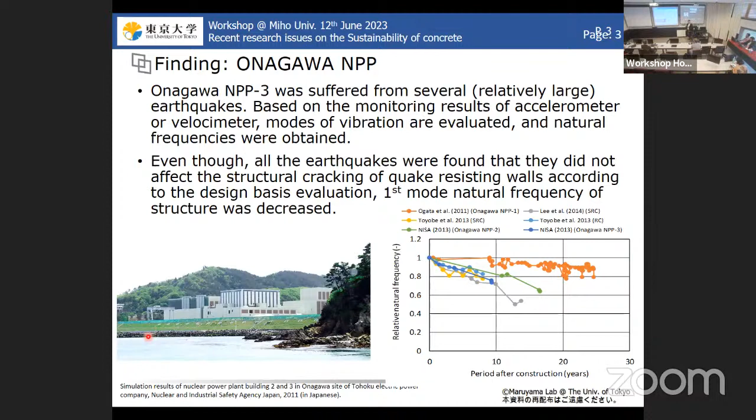And this is the normal reinforced concrete buildings, and here we see a rapid decrease of the stiffness. Some structural researchers generally think that this is due to small or middle range damage of the buildings. But actually, one of my colleagues found that...

this damage doesn't happen during the earthquake. It happens between earthquakes.

So this is an example of the relationship between the deformation and the force obtained from the accelerometer. We put the accelerometer in an important building and calculate the stress-force-deformation relationship every time. We found that during the earthquake, just before and just after, we don't see a difference. But from earthquake to earthquake, we see some reduction.

So this suggests that there is some possibility that something coming from the general environment can reduce the stiffness of the structure. Based on this data, I think this could be explained by the drying of the building, because the drying environment is universal for reinforced concrete buildings.

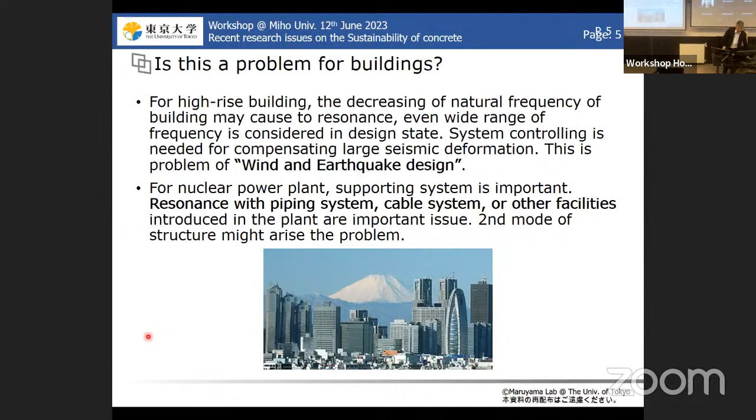So I started to research this topic. First, I would like to introduce the experimental research on reinforced concrete walls. I prepared two reinforced concrete shear walls. I won't explain the detail of the walls, but this follows a quite general Japanese code.

The reinforcement ratio is 2.8%, so a very, very high reinforcement ratio. I cured the specimen for a long period because additional hydration is not desired for this experiment. So I cured the specimen for 90 days.

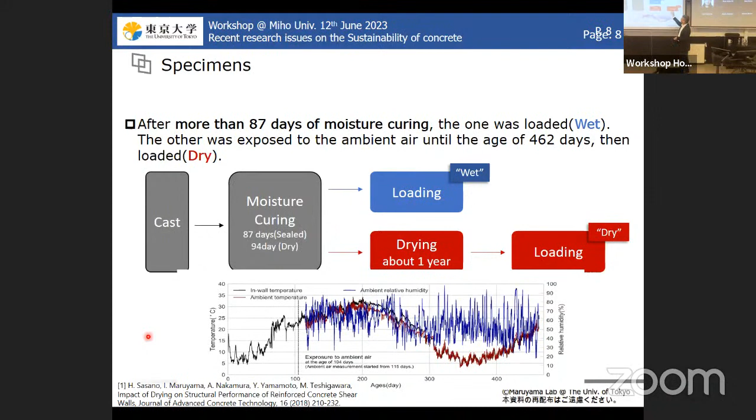Then I loaded one specimen, and the other specimen was exposed to the drying environment for one year, because the thickness of the wall is about 10 centimeters, or 8 centimeters, so it's easy to dry out. After reaching near equilibrium, I loaded this shear wall.

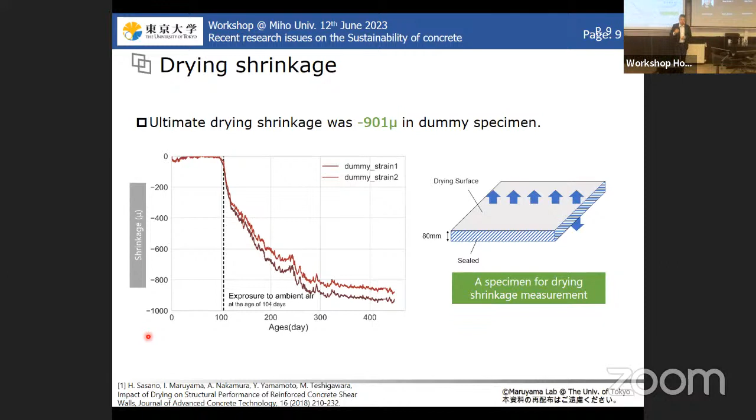I also prepared a dummy specimen, something like this, and measured the drying shrinkage of this specimen. It attained 900 microns, both horizontally and vertically. Then I loaded it using this kind of equipment and performed cyclic loading to evaluate the performance of the reinforced concrete shear walls.

I also measured the properties of the concrete. As you see, compressive strength increased slightly after the drying, while the Young's modulus is reduced. The fracture energy increased almost 50% after the drying. So we have to think about the impact of these changes on the structural performance of the reinforced concrete shear walls.

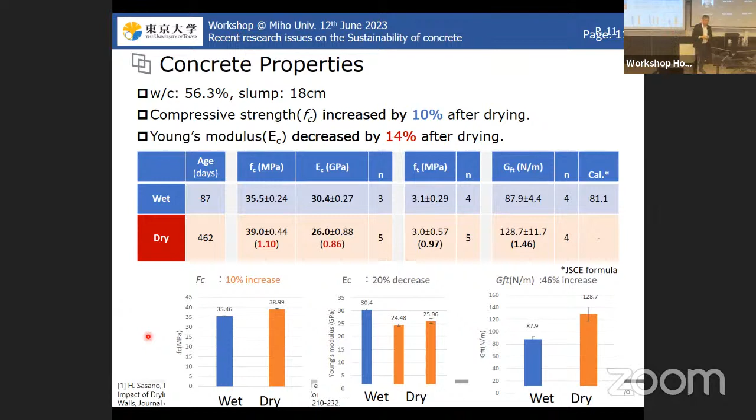This is what we observed after the drying in the shear concrete wall — we found very fine shrinkage cracking. The maximum crack width is just 0.15 millimeters, so it is not visible, and people looking at this shear wall would generally believe it is quite sound.

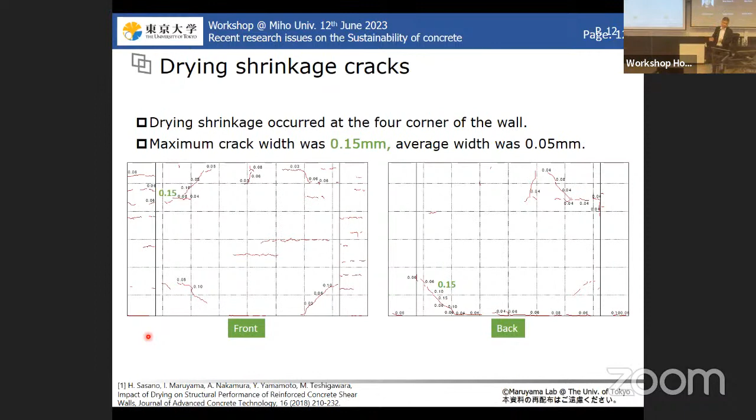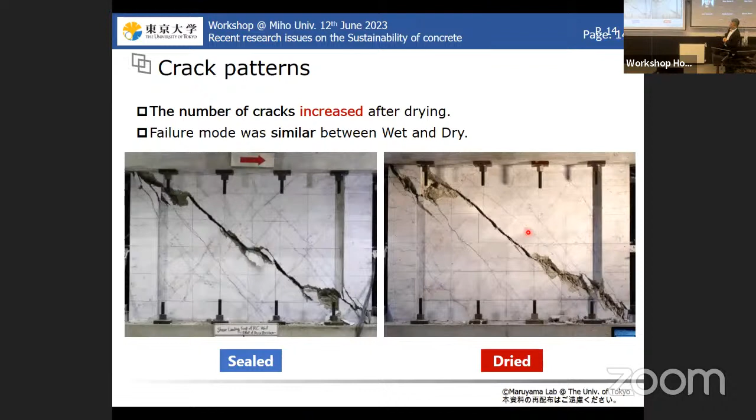The failure mode is quite close, as you see - very similar shear failure. And I tried to calculate some structural things.

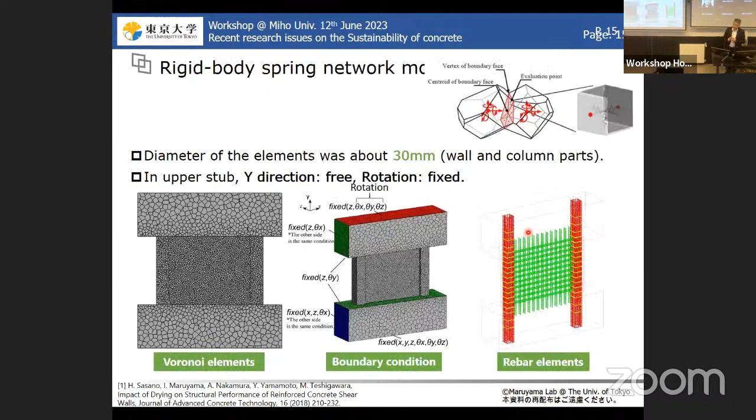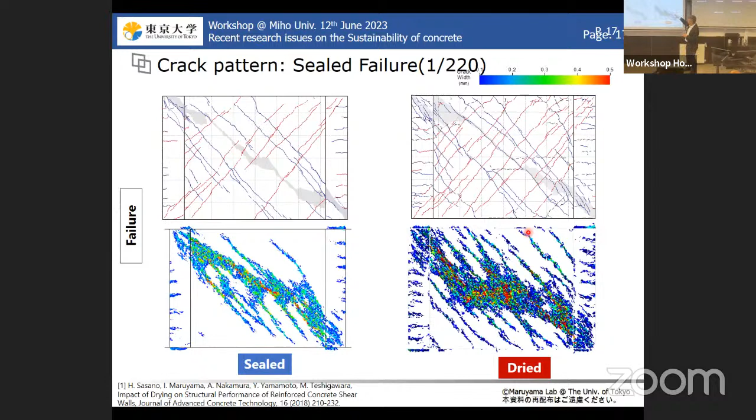This is the comparison of the crack patterns of the experimental results and the calculation results. We see a large number of fine cracks and shear cracks as observed in the dried case. But this is not so important.

What is important is how to calculate the ultimate strength of the shear wall affected by the drying. The ultimate strength can be calculated based on arch action, and we also have to think about strut width and the concrete strength in the concrete shear wall. This concrete strength is based on the material property, but also the factors which affect the compressive strength due to the cracking - I will explain a little bit.

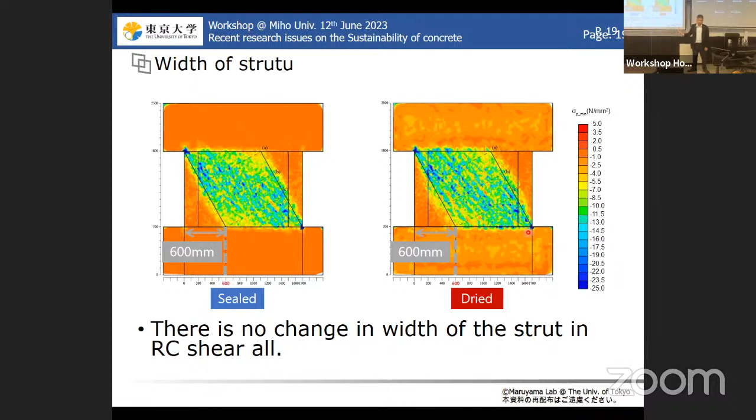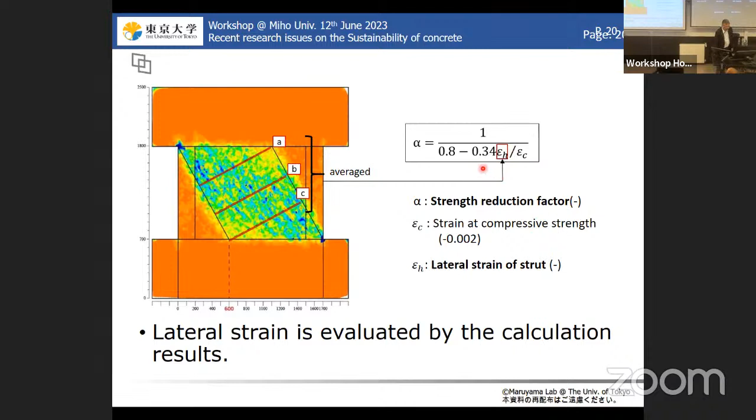To calculate the strut width, we confirm that the width of the strut before and after drying is completely the same. If we think about the concrete strength here, we can calculate how much strain is observed in this direction, which has an influence on the concrete strength in the shear wall. We calculate this strain based on a numerical calculation, and then evaluate the loading capacity.

The most important message of this calculation is that the compressive strength increase caused by drying compensates for the drying shrinkage induced cracking impact on the compressive strength. So if it shrinks and has shrinkage induced cracking, with less friction between the small struts, this has an influence on the compressive strength.

But it deteriorates the compressive strength. Due to the drying, we also see a strength increase, which compensates for the shrinkage induced cracking impact on the compressive strength in the shear wall. Therefore, if the compressive strength of concrete is reduced by the drying, it is quite possible that the loading capacity is reduced by just drying.

Today I couldn't talk in detail about how the compressive strength is affected by drying, but if we use certain kinds of aggregate, especially non-shrinkable aggregate, we see a reduction of the compressive strength. But if we use an aggregate which is quite shrinkable, meaning the aggregate contains clay minerals, we see an increase in compressive strength after the drying.

Now I move to the shrinkage and the shrinkage induced cracks. So now maybe 15 minutes.

In Japan, the natural aggregate resource is now limited, and the west part of Japan is suffering from a lack of good quality aggregate. If we use inappropriate aggregate in concrete, we see a large amount of shrinkage cracking found in buildings and civil infrastructure. So of course, the aggregate type is very important for concrete quality.

For that purpose, we prepared 3 different concretes whose mixture proportion, volumetric mixture proportion, is completely the same, but only the coarse aggregate type is changed. One is a very shrinkable one, and in this case we see large shrinkage like this. If we use, for example, pure limestone - sedimentary limestone - in this case we see very small shrinkage.

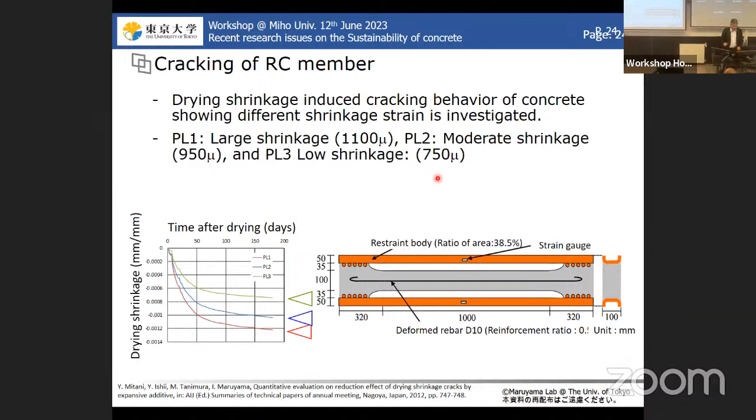Around 650 to 750 microns in this case. So we compared these three concretes under a restraint condition like this. This is the experimental results, and this is quite obvious - if we use the very shrinking concrete, we see a large number of shrinkage cracks.

If we reduce the shrinkage by using non-shrinkable aggregate, we see the reduction of shrinkage in the cracking. But please think about why this happens, because if the main source of shrinkage is coming from the hardened cement paste, and it is restrained by the outer frame, why does putting aggregate inside produce a different kind of shrinkage? That is my question on this topic.

When we swipe the surface of the aggregate with acetone, we found that if we use very large shrinkage concrete, we don't see any cracks on the surface. But if we look at the surface using limestone, we see very fine cracks on the surface. So it seems that it's a trade-off.

The total shrinkage of hardened cement paste should be comparable, but due to the different aggregate type used, one type shows a large number of visible cracks but no fine cracks. In the case of limestone, visible shrinkage cracks are less, but a large number of fine cracks were observed on the surface.

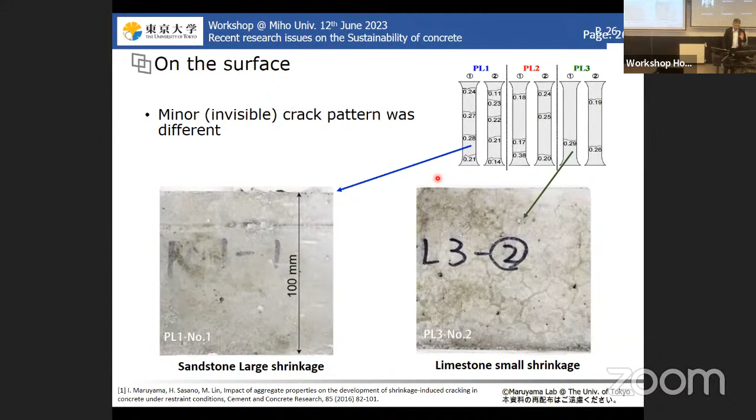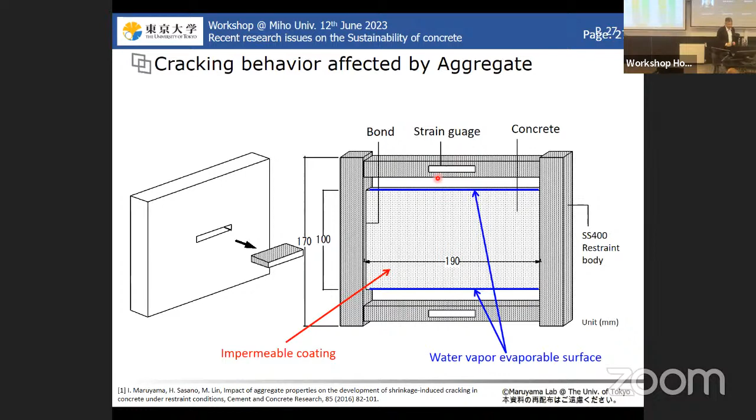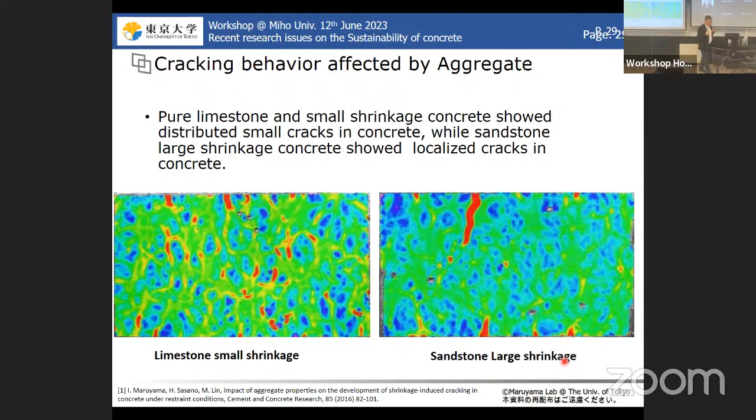So with the unshrinkable property and good quality ITZ, the cracks are distributed like this. But in case of the shrinkable aggregate and less bond, we see the cracks develop further, and visible cracks are formed. So actually, the aggregate crack behavior and ITZ property are very important for shrinkage-induced cracking.

I won't go into detail about which type of cracking is better, but with regard to durability, it seems large localized visible cracks are not appropriate, and distributed cracks are much better with regard to permeation or diffusion of undesired elements from the outside.

So then I move to the stiffness of the concrete. Generally aggregate doesn't shrink, but there is some range.

If we use limestone aggregate and the digital image correlation method, actually for cement paste with water to cement ratio of 0.55, which is a general ordinary ratio, the cement paste shrinkage is something like this: at 60% relative humidity, the average relative humidity in Japan, it attains 3,000 microstrain. But when we use limestone, the shrinkage is almost zero, meaning there is a volume mismatch between the aggregate and the cement paste.

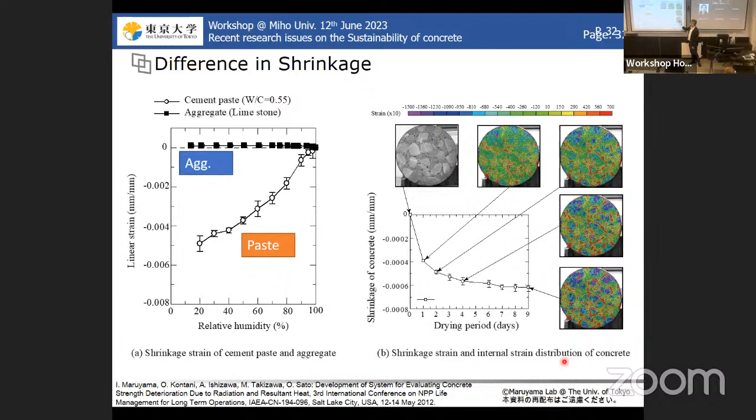So we should see some discrepancy, producing cracks inside. Therefore, around the aggregate, we generally see shrinkage-induced fine cracks, which can be confirmed by the digital image correlation method. If we use limestone, the non-shrinkable one, the cracks are distributed like this, but in case of the shrinkable aggregate, the damage is mitigated.

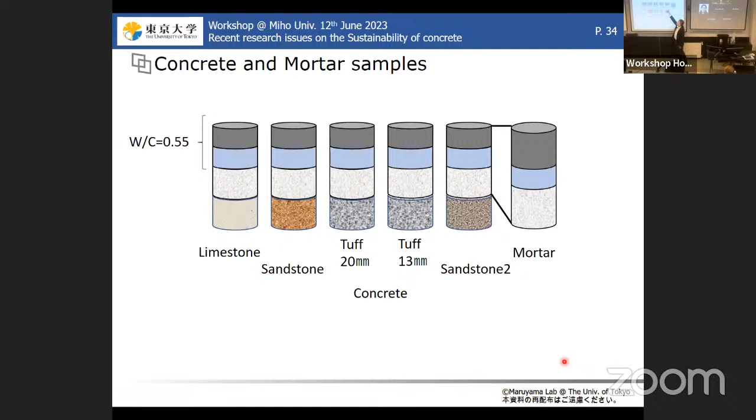It has an influence on some concrete properties. So I made 5 different concretes whose volumetric mixture proportion is completely the same, but only the coarse aggregate was changed. I also made a mortar whose volume mixture proportion is completely the same as that of the mortar part in the concrete.

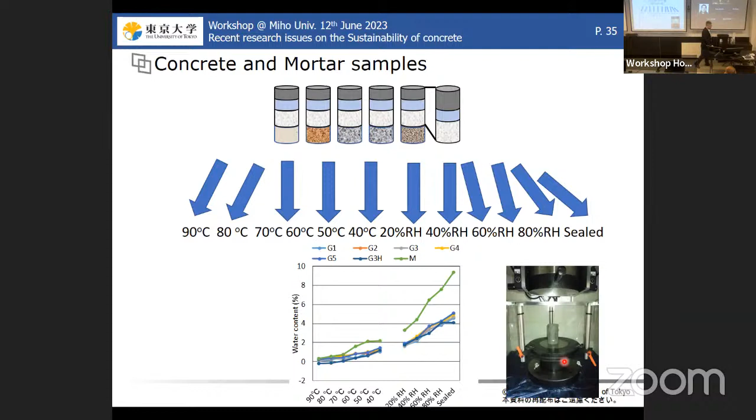After the long-term curing period, we put the specimens in different drying conditions for a long term. This is the desorption isotherm, showing water content of the concrete or mortar. Then we measured the Young's modulus. I also measured the shrinkage of the concrete and shrinkage of concrete and mortar.

So this is the experimental results of the Young's modulus of mortar and concrete. I also measured the paste, but I'll skip that today in detail. In case of the mortar, we see a decreasing trend, but the difference before and after drying is a little bit smaller than that of the concrete.

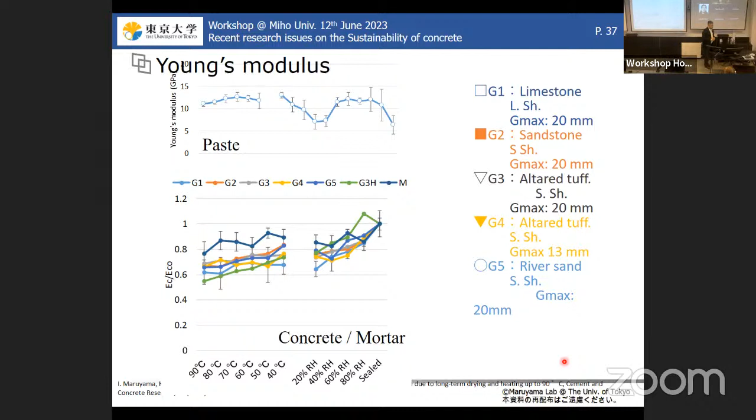Anyway, we confirm that the stiffness of the concrete can be deteriorated by only a drying process. Even at 60%, we see maybe at most a 30% reduction of the Young's modulus due to drying.

If we try to evaluate this reduction of the Young's modulus, considering the crack opening inside, this can be evaluated by the gap strain between the concrete strain and the mortar strain at the same drying state. So this difference should be compensated by a crack opening inside.

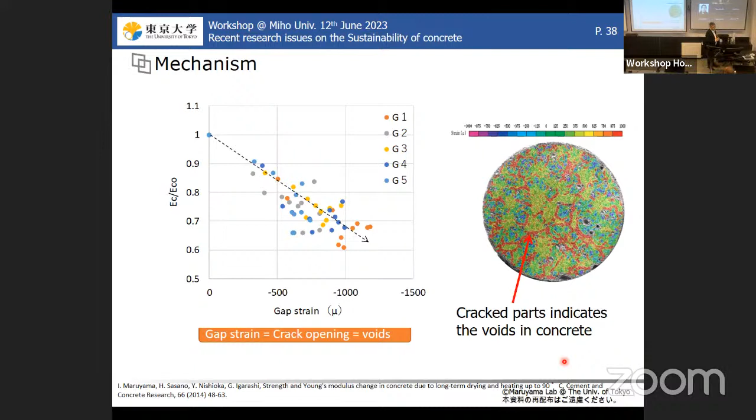Therefore, assuming that the crack opening can be evaluated by the difference between the strains of concrete and mortar at the same drying condition, if you plot the Young's modulus reduction as a function of the gap strain, we see a relatively nice correlation. So we found that the Young's modulus is deteriorated by the crack opening inside of concrete.

But then, how many minutes do I have left? No, it's okay. So we have to control this.

Shrinkage reducing agent has been developed in Japan since the 1970s, and we are debating the mechanism of this agent. I would like to explain what is happening in the hardened cement paste, and then also introduce what happens in concrete.

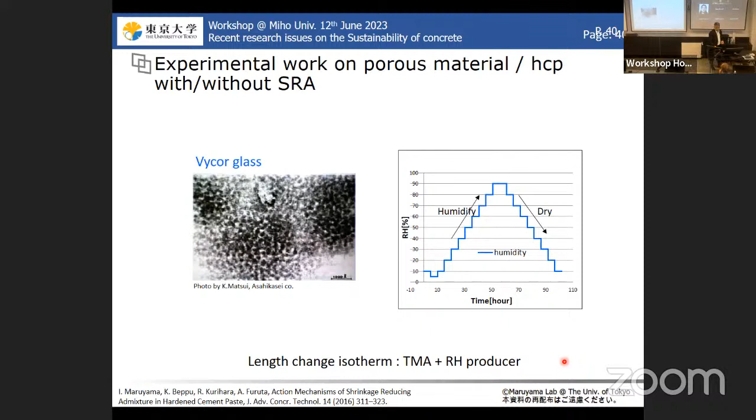From a poromechanics point of view, we try to evaluate the role of the shrinkage reducing agent by using Vycor glass. We change the relative humidity like this, and measure the mass change and the shrinkage. We also try to put the SRA molecule inside of the Vycor glass, and confirmed how the behavior is changed.

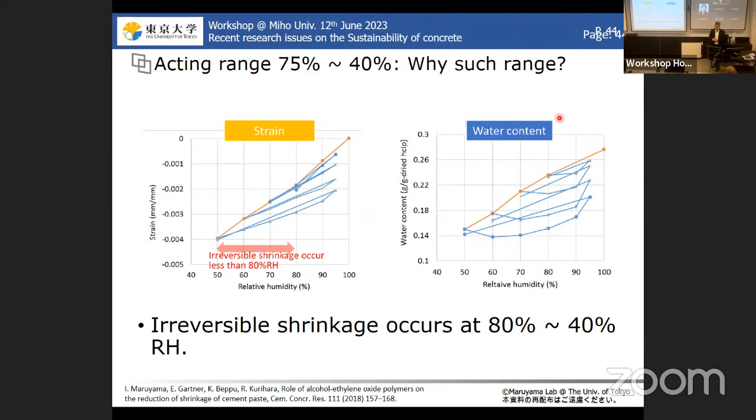I won't go into detail, but this relates to CSH agglomeration behavior under drying that happens during the first desorption branch, and the SRA has an influence on this behavior.

Then I investigated different kinds of SRA. The starting materials are water, ethanol, butanol, and ethylhexanol, and we tried adding different numbers of ethylene oxide groups to these. We measured how these elements perform, believing they have different performance on the reduction of shrinkage.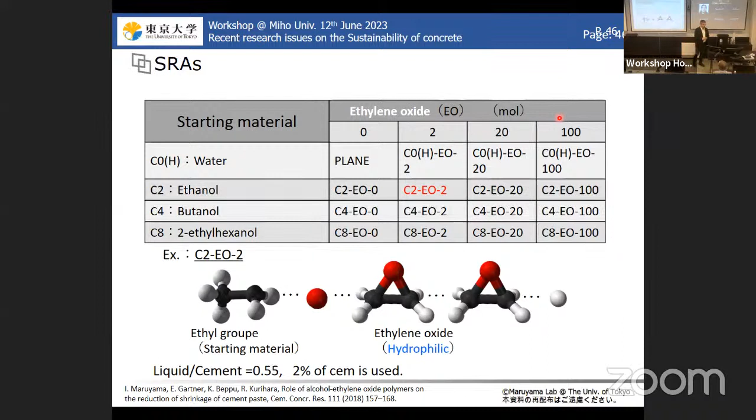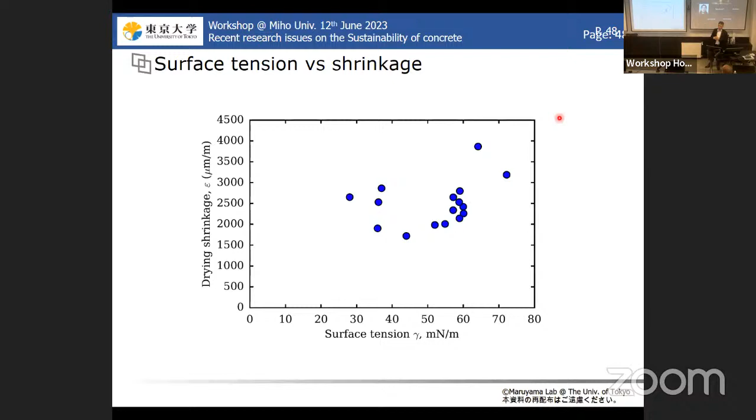But if we plot the drying shrinkage of hardened cement paste against the surface tension of the pore solution, there is actually no correlation. This suggests that the reduction of surface tension of the pore solution is not the dominating factor on the reduction of shrinkage. This has been discussed for a long period, and I confirmed it experimentally.

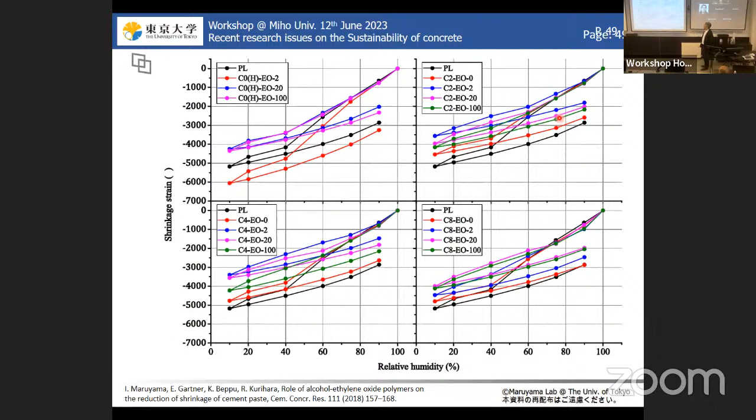This means these SRA molecules act in this intermediate humidity range, where CSH agglomeration happens under the first desorption. We found that two of these shrinkage reducing agents show almost the best performance, while in the case of this one, the shrinkage is increased. So it seems the balance between hydrophilic and hydrophobic properties is very important.

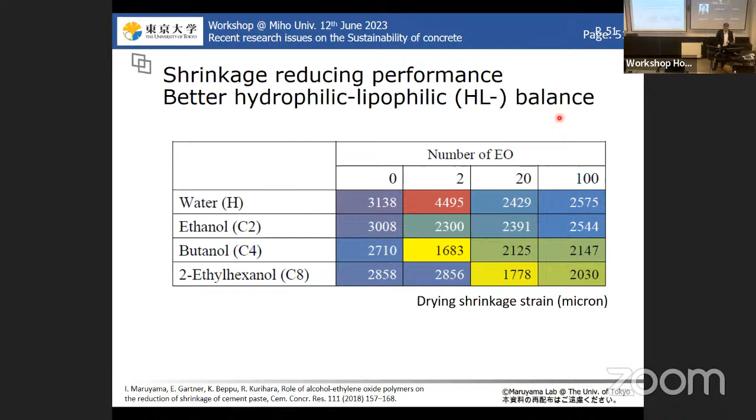Based on additional measurements, we confirmed that the SRA molecules exist in the gel space. Let me explain the CSH structure - this comes from proton NMR relaxometry measurements. We believe the CSH is composed of CSH sheets, like the Feldman and Sereda model, and in the case of these sheets, the distance between them is very small.

In this case, we can define this space as interlayer water, the interlayer space. But if the distance between sheets is large enough, we can define this space as gel pore water. It seems this gel pore space is reduced during drying, which happens during the first desorption. But if we add SRA with the right hydrophilic-hydrophobic balance and short molecules, the SRA can exist in the gel space, mitigating the reduction of space between the sheets, and thus the shrinkage reducing performance is attained.

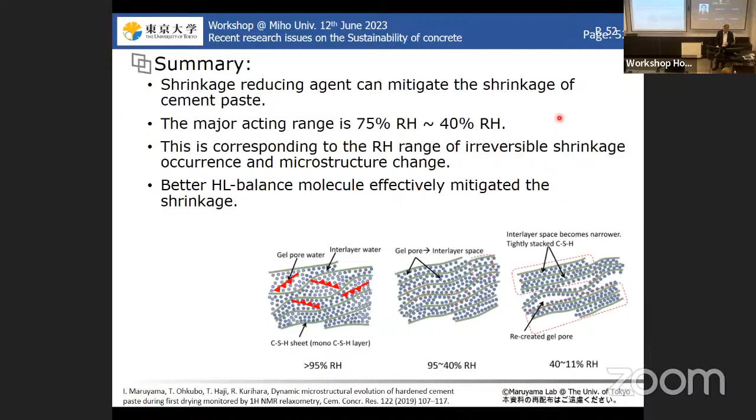Then we tried putting the SRA into concrete. As I introduced, we defined shrinkage of concrete with similarly prepared materials. By adding SRA to this concrete, we produced concrete with reduced shrinkage. These two shrinkage results are comparable, with SR1 comparable to PL2, and SR2 comparable to PL3.

And then we see what happens. The result is as we expected. The number of shrinkage-induced cracks is almost comparable to the same shrinkage level of the concrete.

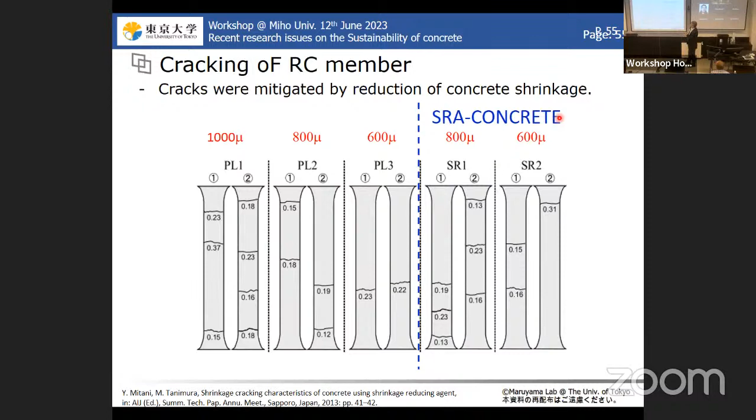This is also what I'm very interested in regarding concrete property. This is the compressive strength development as a function of time. As you see, when we dry the specimen, exposing it at 7 days,

we see the reduction of the compressive strength of the concrete. But in the case of adding SRA, we see no reduction of the compressive strength. Due to that, the damage inside the concrete is mitigated by the reduction of the shrinkage of the hardened cement paste. So compressive strength

was kept under the drying process. Also, the Young's modulus shows a reduction when we expose it to the drying condition. But if we add SRA, the reduction of Young's modulus is very little.

So therefore, even though it's shrinkage, not only shrinkage-induced cracking but also the concrete property was modified. So a reduction of the damage inside the concrete could be very helpful, especially for keeping the stiffness of the concrete.

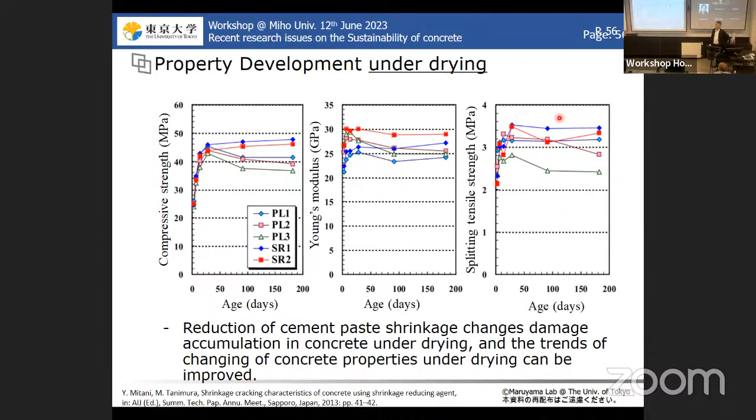Therefore, I believe that for long-term use of buildings, SRA is quite useful. This is a summary. Thank you for your attention.

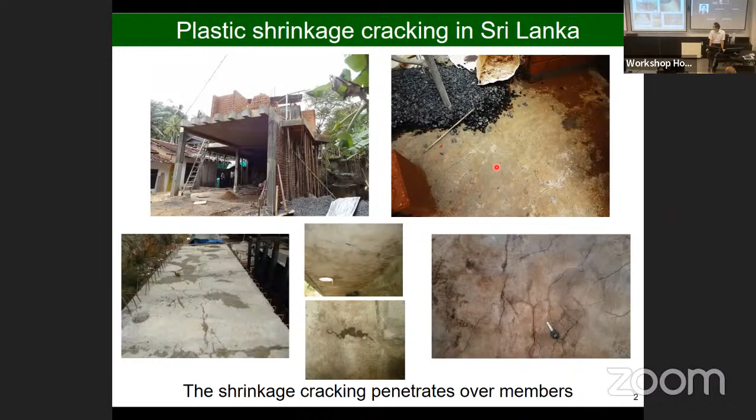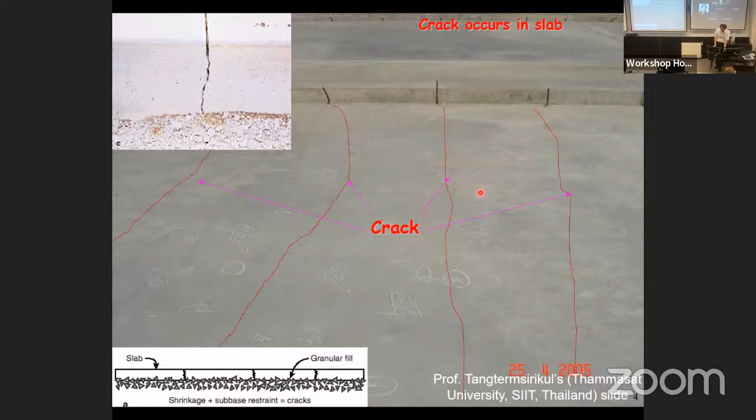This is a slide from a Thailand professor. They also suffer from cracking, especially in the slab, due to insufficient curing caused by hot weather conditions. According to him, they have very big slabs, so it's very difficult to cure the surface simultaneously. That is why they suffer this kind of cracking.

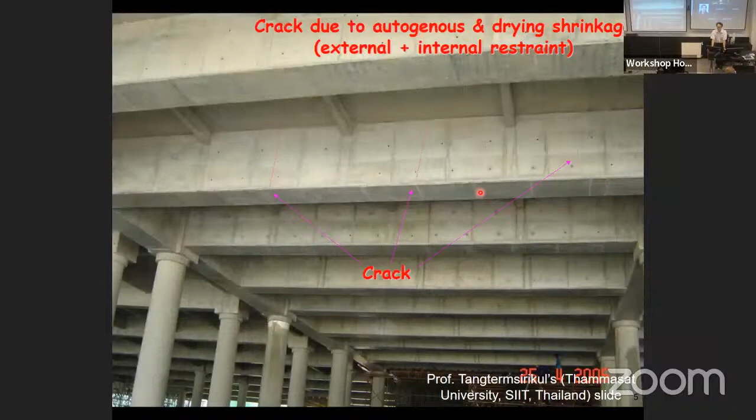He also introduced some cracking issues due to shrinkage, as Dr. Maruyama explained. But the situation in Thailand and Sri Lanka is anyway, the weather is much different from Japan, especially the hot weather and strong sun radiation.

Another issue is water. In the case of Thailand, there is heavy raining, sudden rain, and especially at the side of the beams, there are gaps, and strong rain leaks in there. This can cause spalling and corrosion, since corrosion can be induced by water penetration and also oxygen. That kind of deterioration is often found at the sides of beams.

Another issue is from Vietnam. My colleague explained that they have a big crack in the center of the piers of a bridge, and they're wondering what the reason is. The crack is 3 millimeters, very big, and that is a big problem. Their conclusion is that this is thermal stress and drying shrinkage. But the question is, can shrinkage cause such a large crack, 3 millimeters, and why is it so localized?

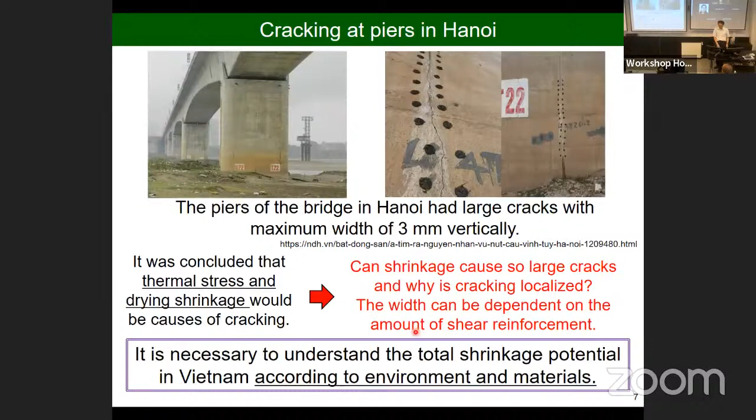Of course, in Vietnam there are no earthquakes. The reinforcement amount is different, but they don't know the potential of shrinkage, how much the concrete shrinks in Vietnam. As Professor Maruyama pointed out, we don't know what kind of aggregate is used. We know the aggregate type in Vietnam, but I don't know how much shrinkage can vary depending on the aggregate. That is also a practical issue in Vietnam, but they don't know. They always say cracking is always caused by shrinkage, drying shrinkage, and improper curing, but they don't understand the clear mechanism, the clear reason.

They always say cracking is attributed to shrinkage, but when I asked them how much shrinkage potential there is in Vietnam or Thailand, they don't know. They don't have a database. They always say, I don't have a climate room, I don't have this kind of equipment. But I simply asked them, why do you not measure the shrinkage outside? You don't need a climate room, just check the potential.

They also have some fly ash cement, and blended cement with limestone powder. Also important is the boundary condition. In this case, cracking happened on one side but not the other. That is not shrinkage cracking, that is bending cracking, right?

This one is also interesting. Here there is very severe corrosion deterioration, but here there is almost none. The reason is this side mainly gets rained on, and the inside does not. So boundary condition and surrounding condition are very important, but they don't discuss this kind of condition so much.

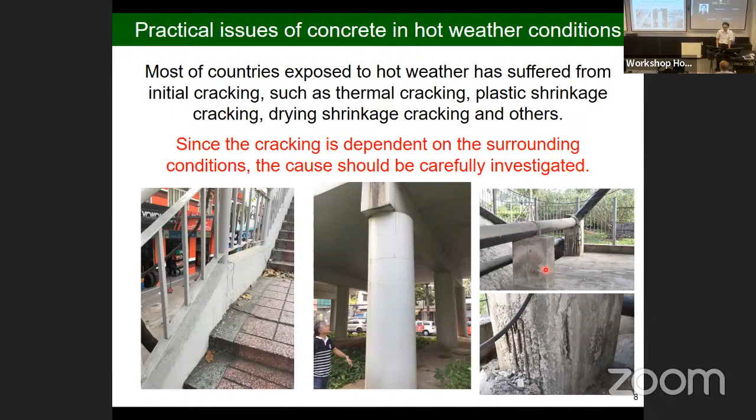Another issue is industrial standards and design codes. Generally, developing countries in Asia have mainly used American or European codes, such as Eurocode, ACI, and ASTM, for material quality.

In Thailand and Sri Lanka, for example, aggregate and cement properties would be different. Also the climate is different. So they should have their own code, but this has not yet been discussed. That is one motivation to discuss with them.

Another issue is hot weather concreting. Generally in Japan, hot weather concreting refers to concreting when temperature is over 25 degrees Celsius. That is a little bit special concrete in summer. Here in Portugal you also have winter and summer seasons, right? But in the Asian tropical region it's always summer season, so there's no special hot weather concreting.

Also, they sometimes apply empirical models of shrinkage and diffusion and other properties based on another country's code. Especially for shrinkage, they use, for example, ACI or FIB code, or JSCE. But those models are based on that country's experimental database. In the case of developing countries, they don't have any database, they just fit the model. Then they say, oh, that's not so good, it doesn't fit. Of course, that's natural.

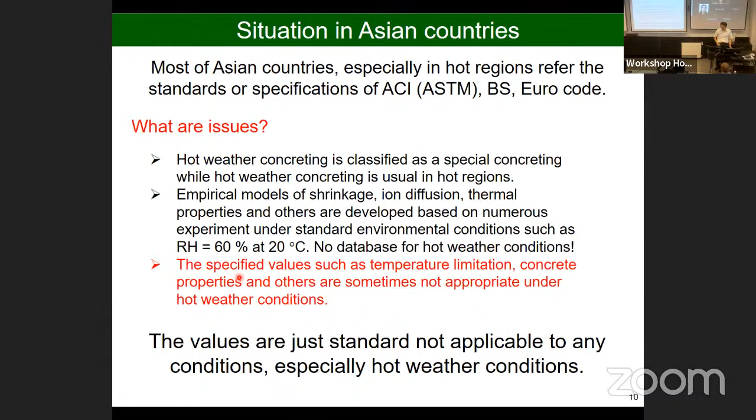Also, especially engineers in developing countries, they always care about the specified value, such as temperature limitation - how much temperature differential, how much placing temperature. That is also a big issue for them. No flexibility, always fixed based on other countries' standards. That is also an issue. I would like to introduce one example.

For temperature limitation, the allowable concrete temperature in placement is generally less than 35 degrees Celsius. Probably in Portugal it's the same, right? But the question is, why 35 degrees Celsius? How about 36? 35.5? What happens? What is the issue? Sometimes engineers are questioned about this, but they always just follow the ACI specification.

But recently, in the case of ACI, they did not specify the value. I discussed this with an American professor. He told me it should be flexible, not so fixed with a specific value - engineer judgment is necessary.

But for an easy way, following the specified value is easier. If flexibility exists, then what is the responsibility? If some problem happens, it's completely your responsibility. If so, everyone wants to avoid that, right? But if we follow this fixed value and a problem happens, that's not my fault. If so, it's better for the practical engineer.

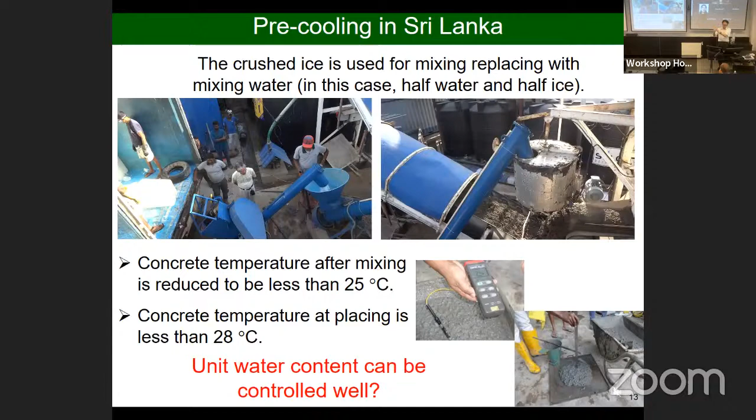That is the issue. Then there's another issue - a very interesting situation. They try to reduce the placing temperature anyway. What did they do? They always say the temperature is less than 28, but ice is dropped in. Then I'm wondering how they control the unit water content correctly. Also, the ice may remain as ice, not dissolve. If so, I don't know - even if the temperature looks okay, some problem may happen later. That is the issue, just focusing on temperature.

This was also explained by the Sri Lankan professor, Professor Nanayakkara. Anyway, the temperature limit in Sri Lanka is that maximum temperature shall not exceed 70, and the maximum temperature differential is within 20 degrees Celsius. It comes from BS, British Standard, due to historical reasons in Sri Lanka.

His question is, if it exceeds, for example, if the temperature differential exceeds 20, do cracks surely occur or not? Actually this is a very safe value. But if they specify it like this, it's very difficult, especially in hot weather conditions, since the maximum temperature can easily increase over 70. Then they are suffering from this point.

This value is also specified in ACI, but it's only specified in ACI 301, not in ACI 207 from the massive concrete committee. That means, as the American professor said, ACI has some flexibility - 301 specifies it, but 207 does not. But that kind of background is not well understood in developing countries.

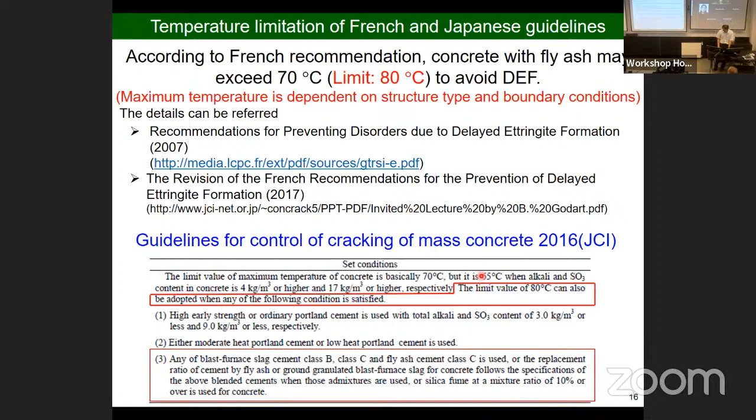Installing other guidelines sometimes has problems. Also, a practical issue is temperature in hot weather conditions. According to developing countries' engineers, they always cast concrete at night, not daytime, especially because of morning traffic jams. Thailand and Sri Lanka have such heavy traffic jams that they cannot transport concrete for more than 2 hours. This is not a technical issue, but a social one.

They always check the limitation using a mock-up test, but the mock-up test is not specified. They just make their own site tests and check the effect of temperature, so that is also sometimes not so clear.

In developing countries like Sri Lanka, Thailand, and India, they always use mineral admixture to reduce heat. But why should the maximum temperature be less than 70 degrees Celsius, even if the replacement ratio of mineral admixture is higher, over 30% fly ash replacement? If so, as I'll explain later, delayed ettringite formation (DEF) can be greatly inhibited, but they just follow the temperature limit. They don't consider the material. That is the issue.

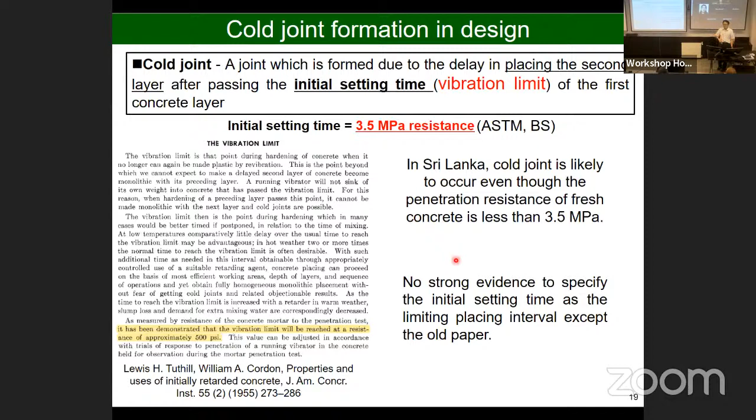If so, cold joints easily occur. In the past, this value was specified, but now the recent ASTM standard no longer specifies it. That's why sometimes they just follow the past value from previous specifications, but don't change their mindset. That is the issue in Sri Lanka.

Then recently, our study found that 1.5 MPa is the threshold to form a cold joint. So they should check this kind of recent work.

The evaporation rate specified is based on Power's work from 1936, a very old one. So they probably need to check whether this value is applicable to their country, and also check their material's applicability. That is also an issue with such values.

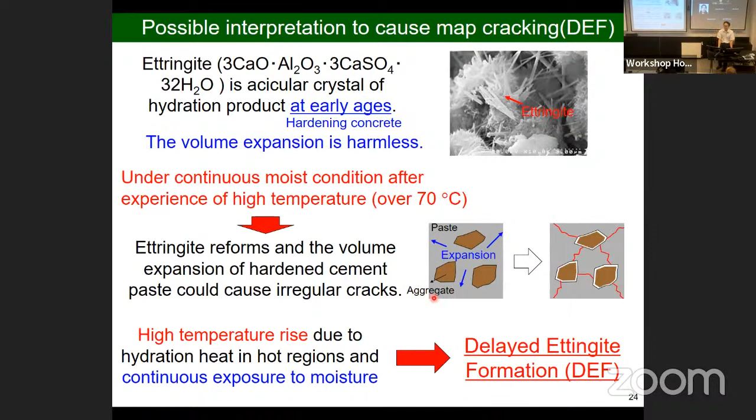Then probably this exclusion is not necessary. That's why they always say, okay, temperature is very high, that's why DEF. That is just a simple conclusion. They just exclude ASR according to their experience, but the problem is what they judge as reactive or not reactive is based only on a chemical method.

That judgment is based on the chemical method, but this standard was actually withdrawn in 2016, though they're still using it. Dr. Yamada will explain that later, but anyway, the problem is they just use this kind of old method.

Dr. Yamada will explain that we now have state-of-art technology to detect ASR. In the case of Thailand, ASR was found according to Dr. Yamada's work. Also, recently in Thailand, the possibility of ASR has been studied. ASR would probably occur even in India or other countries like Sri Lanka, but they don't check for it.

Another point is that they recently use fly ash, and if so, both ASR and DEF can be inhibited. That's why such map cracking may not occur in the near future. But fly ash properties are different in each country, so that should also be studied to check how it can inhibit DEF or ASR.

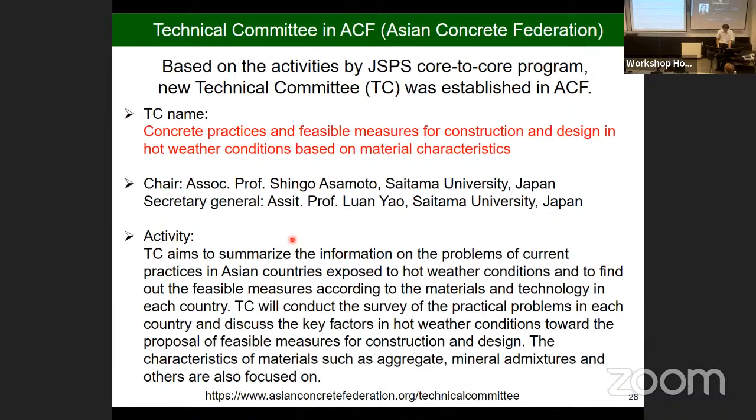Then just some member is here.

We are surveying the practical problems in each country due to hot weather conditions. Generally, their suffering is cracking, especially from improper curing and so on. But regarding hot weather conditions, we still need more research. What happened? For example, at 35, 36, 37, 40 degrees, what happens in the concrete?

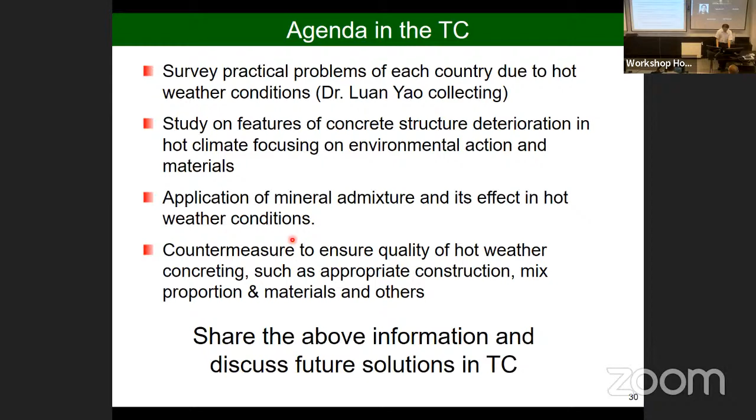Also, their material is different - the cement properties and characteristics are different. If so, probably more research would be necessary. That is also an interesting issue. In Portugal also, your temperature is sometimes over 30, and you said sometimes 40. So we still don't clearly understand what happens under 40 degrees Celsius and so on. That is also one motivation to discuss with them.

And then we try to summarize the technical report to deal with the practical issue in hot weather climate. Finally, if we publish some guideline to summarize the issue and feasible construction and design in hot weather conditions, it is a very good goal, but we are still discussing. Now we try to summarize the issues in the report. Hopefully it will be opened soon, maybe within this year.

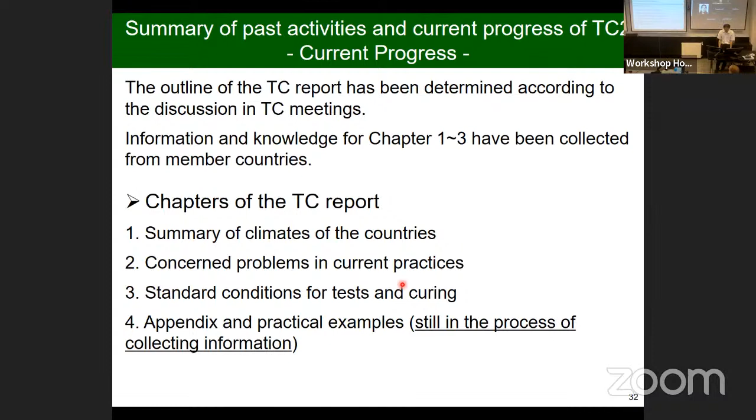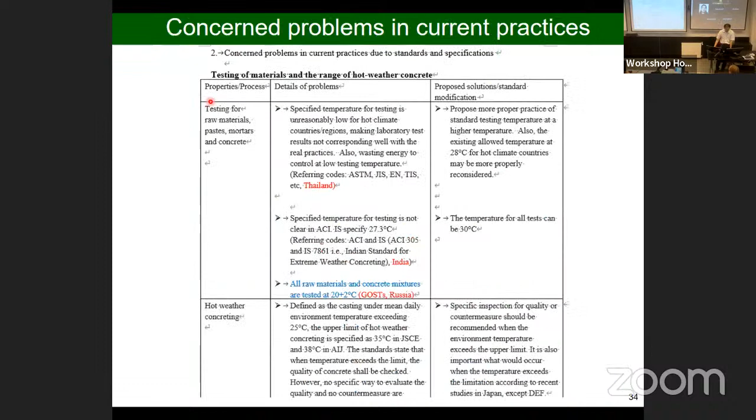If you are interested, you can also refer to the ACF homepage. We summarize each country's situation, what the problem is, what the testing method is in each country, and also what the standard condition is for test and curing in each country. That kind of information will be somewhat useful to Asian countries. So this is a remark. That's all from my side. Thank you for your kind attention.

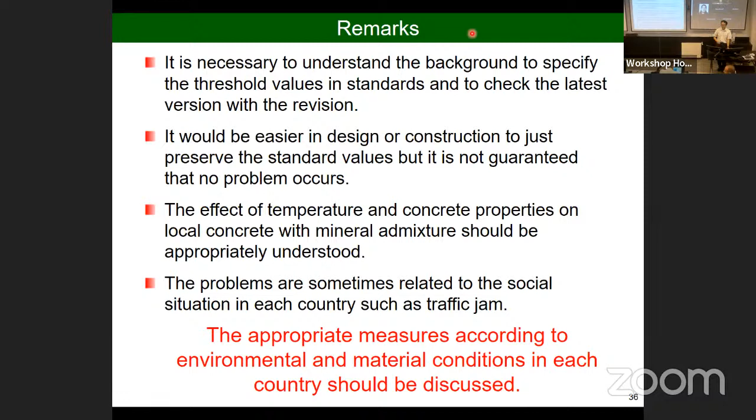Thank you for the presentation. It's really interesting, and it's a really complex situation because you have problems in all of the stages of construction and also the definition of the materials. What do you think would be the most, not the most useful, but the most simple solution for this problem? Do you think it would be to define some guidelines for them to apply, or to define some tasks for them to execute during the process?

That is a very difficult question, because the construction quality is very dependent on the situation. But also one problem is they don't know what happened. They always say, okay, everything is shrinkage. But can shrinkage cause such a large crack? It depends on the boundary condition. If they know what happened, before construction they can design to avoid such kinds of cracking. For example, if shrinkage is 1,000 micro, we can do something to avoid the structural way. Also, if their reinforcement is inadequate and causes large crack widths, they can put more reinforcement. The problem now is they don't understand the reason. They just say crack.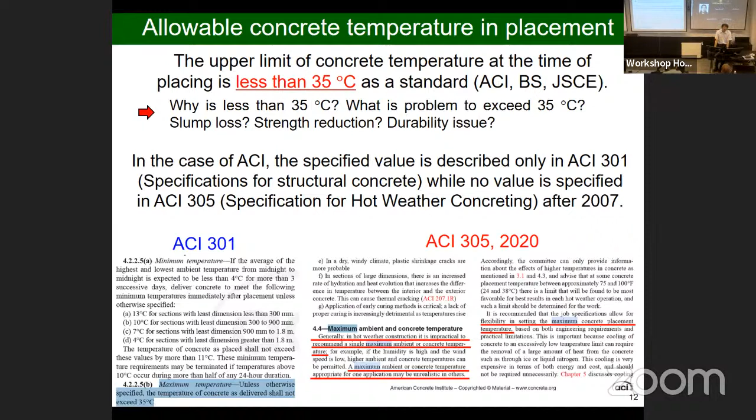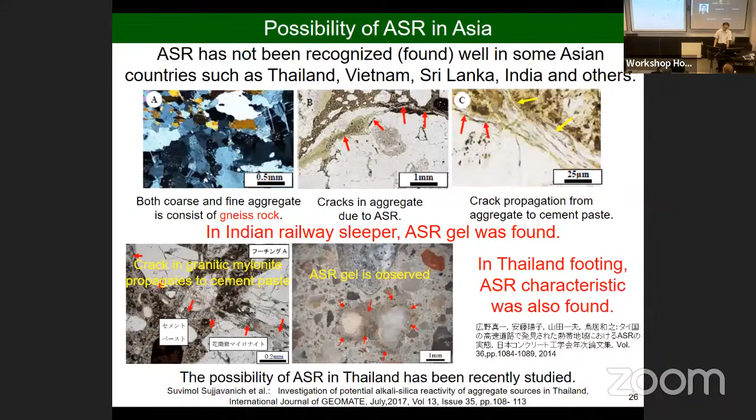In the case of Japan's JSCE code, we now move to performance-based design. Performance-based design is not about specified values and so on, it just depends on the decision of the engineer, following the basic principles. But for most values, for example 35 it's not so significant, but for 20 it's very, very conservative to avoid any possibility. So if you feel this will not affect things much, you may gather more evidence. For example, in the case of DEF, I'm now trying to change our guideline because if we have mineral admixture, even under accelerated experimental conditions, there's no expansion. If so, I may say, okay, if we use fly ash at 30% replacement, there's no limit on temperature. Based on that kind of recent work, we can do something to avoid such limitation values.

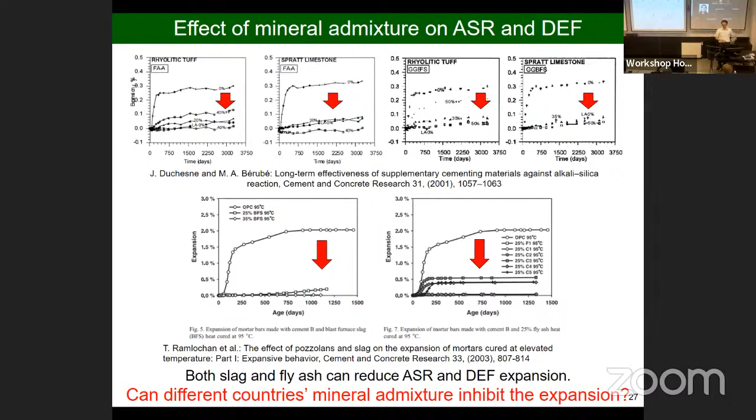Personally, I think this is why students need to study recent work, otherwise we just follow past work from 1950 or whenever. ACI sometimes changes, but they also check the history of the design code. Also, you're now developing the FIB code, right? Recently, yes.

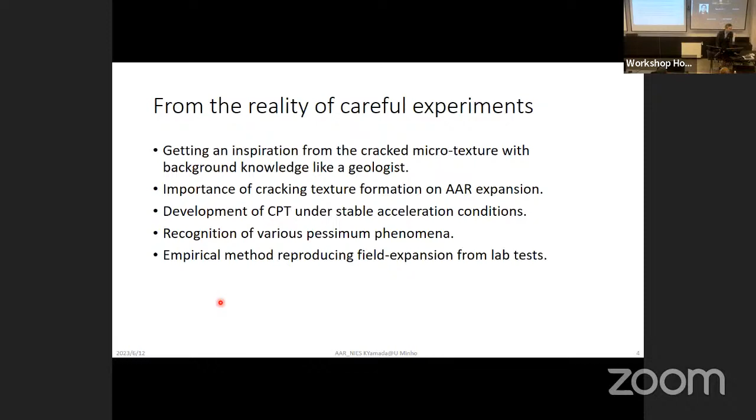Every time I've shown this, it creates difficult data that makes trouble, I think. Today, I want to show you some very complicated data. Okay, first, I want to show this picture.

There are documents describing the detailed advanced procedures of petrographic diagnosis. If you are a specialist, you can fairly easily identify reactive minerals such as tridymite, cristobalite, opal, volcanic glass, cryptocrystalline or microcrystalline quartz, or chalcedony. Of course, you may not be familiar with these names, but these are the fundamental minerals causing alkali-silica reaction. With the reaction of this silica mineral with alkali hydroxide - not alkali metal - alkali-silica gel is generated. This is very viscous, generated inside the aggregate.

This is, of course, an estimation, but this kind of estimation is very important for the next topic, so there's no need to say more about it today.

But if this aggregate is mixed with some other non-reactive aggregate, such a case is very popular in some seaside cities like Tokyo, Hong Kong, or Jakarta, many places. They have to import aggregate from somewhere, and it's the cheapest way. So in some cases, reactive aggregate and non-reactive aggregate are mixed.

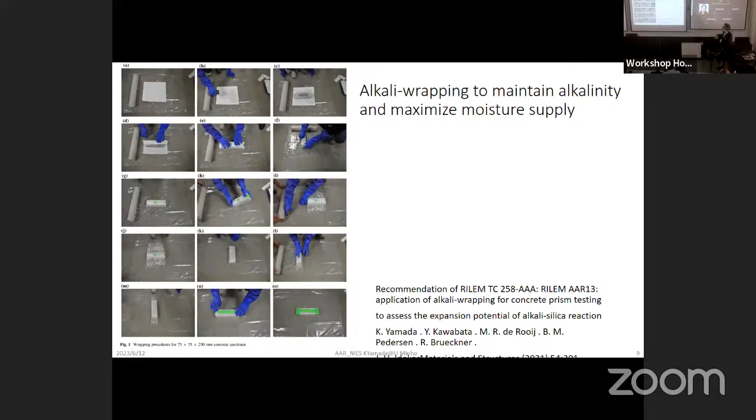And this procedure is published as RILEM AAR13. So now there is no need to worry about alkali leaching from the concrete prism even over a long time. Then I'll talk about the alkali threshold.

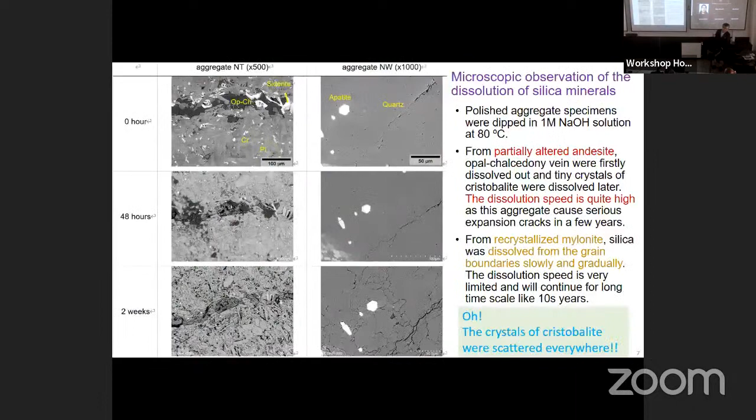But if the generation of alkali gel is fast enough, it will be difficult to close this crack by chemical reaction. This is a hypothesis, but if we think so, at higher temperature or more alkali, too fast a reaction of silica results in a continuous movement of alkali gel outside of the aggregate without expansion.

This is my hypothesis. So it is very difficult to accelerate ASR expansion, because the alkali-silica reaction itself we can accelerate - this is a chemical reaction, higher temperature and higher pH give higher reaction speed, which is very reasonable. But expansion requires the generation of silica gel to be confined in some place, and the confining mechanism is a reaction with cement paste. So that's the balance - it is very difficult to accelerate.

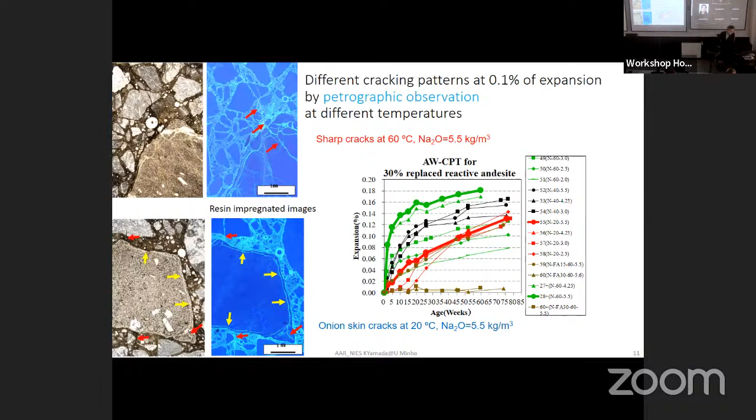If so, what can we do? Anyway, that's the case of temperature. Many people want to know the alkali threshold value below which we expect no expansion will take place. This is the reasonable case.

According to this, below 3.0, no expansion would be expected even over a long period of time. But unfortunately, this is a case of Norwegian mylonite, some deformed rocks. This is the case at 60 degrees, and this is the case at 40 degrees. At 40, as time passed for more than 2 or 3 years, less alkali expanded more. In such a case, we cannot determine a threshold value.

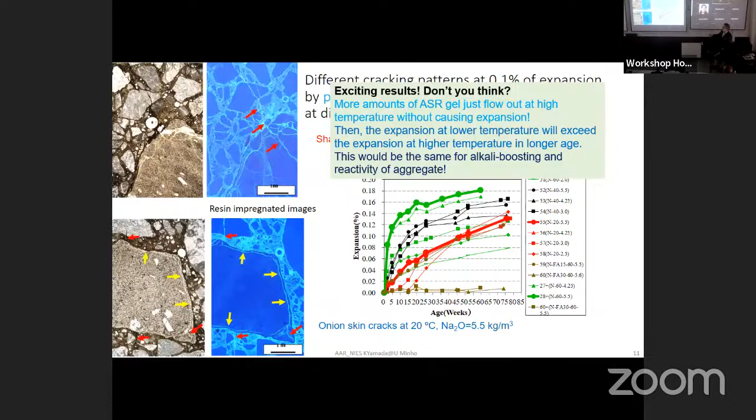In the concrete prism test over 2 years, during that time, from a concrete prism without wrapping, a significant amount of alkali was lost. They estimated this, but reality is a bit different, as explained - mild leaching results in more expansion in the final outcome. So then we need some model.

We cannot get a direct correlation between lab test and field expansion. So we have to use some model to convert laboratory behavior to field expansion. One model is a very basic model, proposed by Iwamoto in 1992 - a very old model.

But the basic concept is very simple. Iwamoto, Furusawa, and Oga are the authors who propose this model. First, think about the dissolution speed determined by the alkali chemical method.

Then this generated ASR gel first fills some spaces in the rock. Then this gel should be converted to some expansion, and this reaction results in the reduction of hydroxide concentration. Of course, with this kind of model, we need to fit some parameters. But by fitting some parameters, this model can reproduce complicated behavior like this.

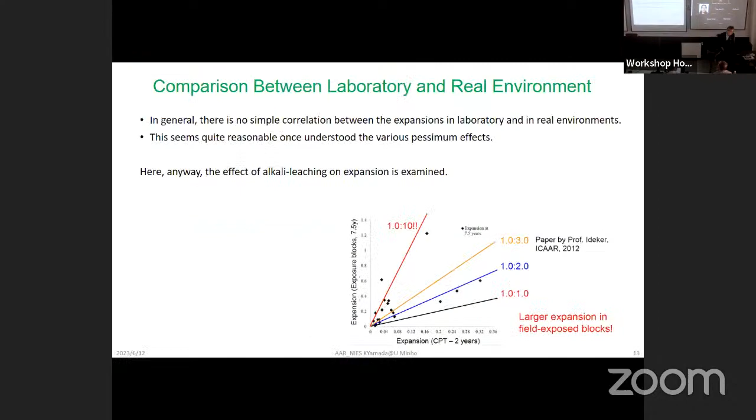Today's my talk is concentrated on the difficulty to determine the threshold value. There are some reasons why the laboratory test can or cannot reproduce the field expansion. So this is the main topic of today's talk.

So I prepared some other more comprehensive material, but today that will be enough for you. Many things I explained and you may be confused, but if you have some inspiration from my talk, you can learn about this.

This content is presented as at the last ICAAR conference, International Conference on Alkali-Aggregate Reaction, one year before this. There's a keynote speech paper in those proceedings. You can check again if you have interest in this kind of way of thinking of alkali-aggregate reaction. This is very different from others. For me, this is a very natural way of thinking of the reaction from the viewpoint of geologists.

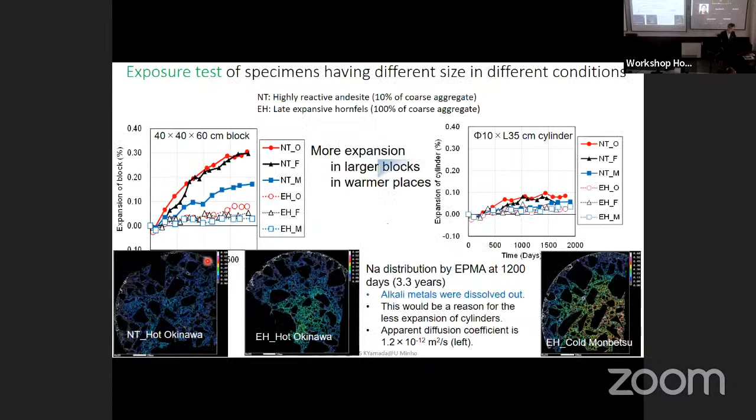Yes. First, I would like to go back to the alkali-silica reaction. I used to say usually it's like a time bomb in the concrete because it will explode, so the talk is a really interesting topic. That's also interesting to me. But the point of the question I would like to ask you is about the glass. The fly ash is going down in the world because we have to close the coal plants, and some researchers said that glass would replace part of the clinker.

You know that glass has problems with alkali-silica reactions. Some research said that if it is powder, there is no problem. What is your experience? What is your idea about glass replacing cement, and this topic of glass and concrete and alkali-silica reaction?

Yes, it just depends on the chemical composition of glass. Some soda glass is not good for it because soda glass contains a significant amount of sodium. By exchanging sodium with calcium, which happens in the cement paste, that results in more alkali metals in pore solution, which may accelerate the reaction. But glass from volcanic glass, you can use that, it's a natural pozzolan kind of. So artificial glass from some bottles will be dangerous.

But the important point is the pH of pore solution. pH of pore solution can be calculated from the calcium-silicon ratio of CSH. This value can be calculated assuming the chemical composition of glass and the reaction degree. We can calculate this value. Then, of course, we have to think about the sodium concentration. It is possible for material science, I think, but if it is a fine material, really a powder lower than 50 microns, like the size of cement...

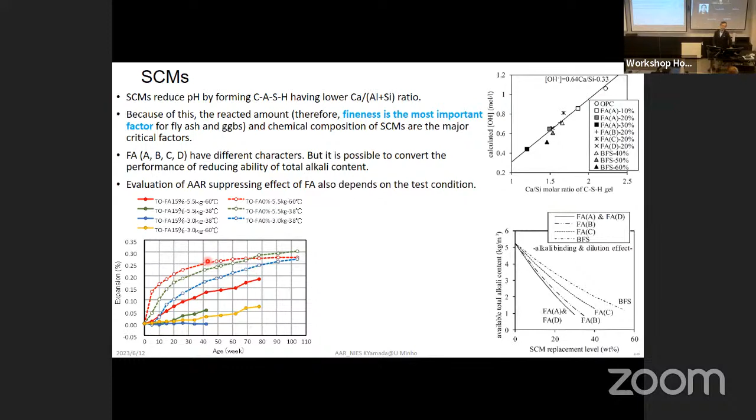Do you have any more questions? Yes, could you show me the image related to the expansion from aggregate?